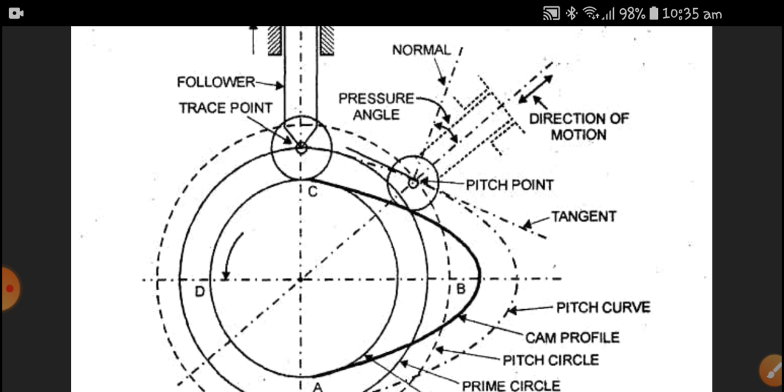And next, cam profile, pitch curve, tangent to the pitch point, and the pitch point, pressure angle, normal to the cam, direction of motion. Trace point is a very important point for the cam.

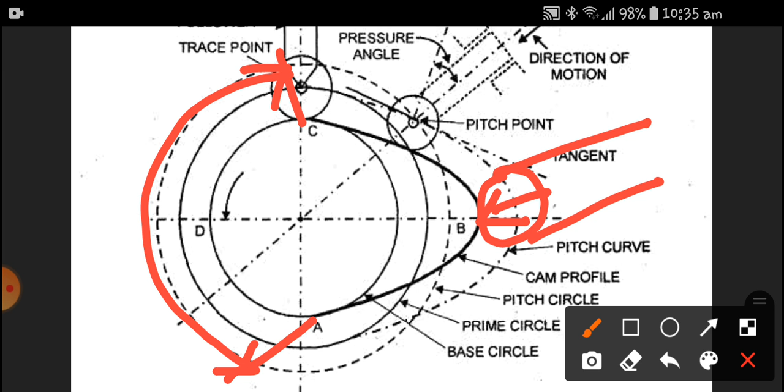The follower: once the cam has a rotary motion, the follower has a reciprocating motion. Cams have an eccentric rotation. Here this point is called the lobe, this is called the top lobe point. At this point, when the follower reaches here, it has maximum displacement, and this angle is called the dwell angle, where the follower remains the same. The follower position remains the same, which we will discuss further.

First of all, as I said, the cam is a mechanical member and it has an open higher pair. The follower and the cam have direct contact. And once again, I would like to remember this: the higher pairs have either a point contact or line contact in nature, and here the cams and followers have a direct contact.

Cam motion is reciprocating or rotary, and most of the time, 95% of cam and follower applications, the cam is rotating and the follower is reciprocating. And here, the cam is the driver member. Everywhere the cams are used, all cams are driver members and the followers are the driven member. The follower can rotate, reciprocate, or sometimes it can be oscillating also.

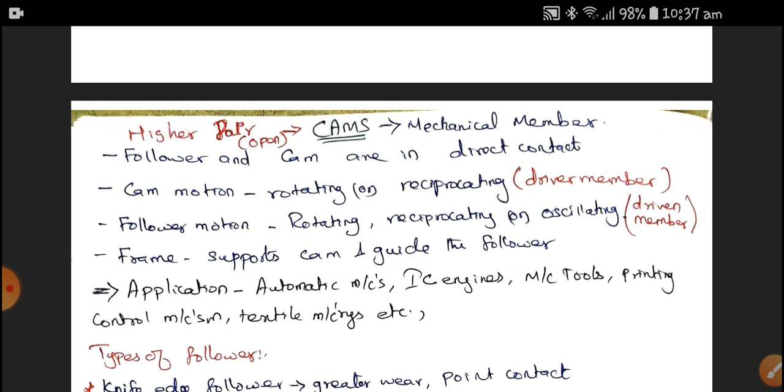Here the frame is one thing which will support the cam and guide the follower, that is called the frame. The applications of cams and followers are automatic machines, IC engines, machine tool applications, printing control machines, and textile machineries, etc. Wherever we need automation, cams are very useful for making automation.

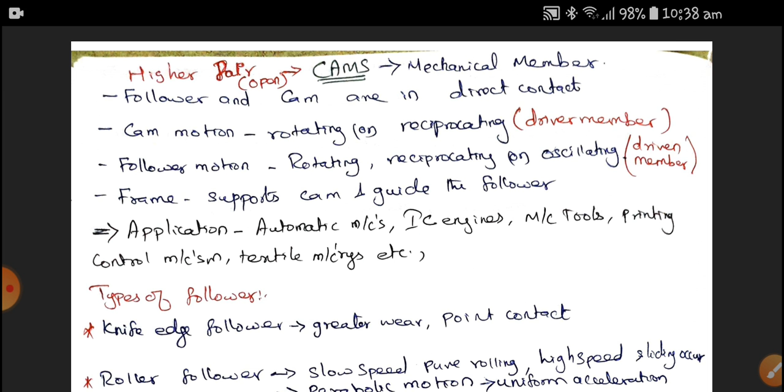And also nowadays, most vehicles running with an IC engine definitely have a cam. The cams are very important components of the IC engine, where the cam operates all the valves, all the spark plugs, spark plug, diesel pump, all are operating. That is why it is an important element in the IC engine.

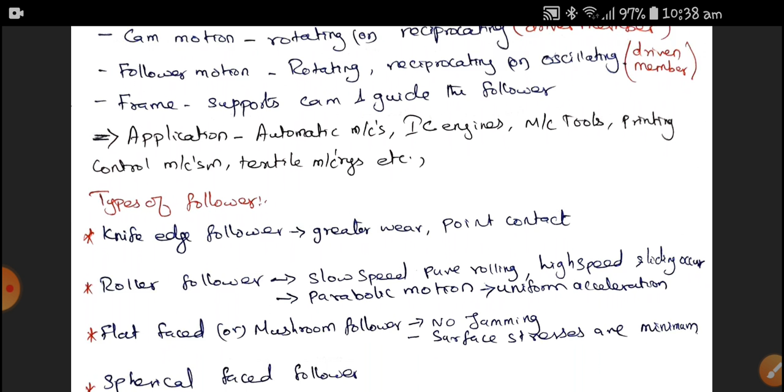And next we are going to discuss types of follower. We have nearly 8 types of followers, and the first one is the knife edge follower. The knife edge follower has a very sharp point on the follower, where the point of contact is a point contact.

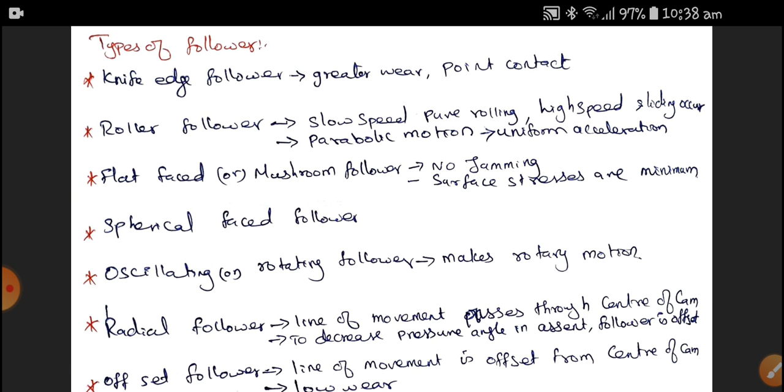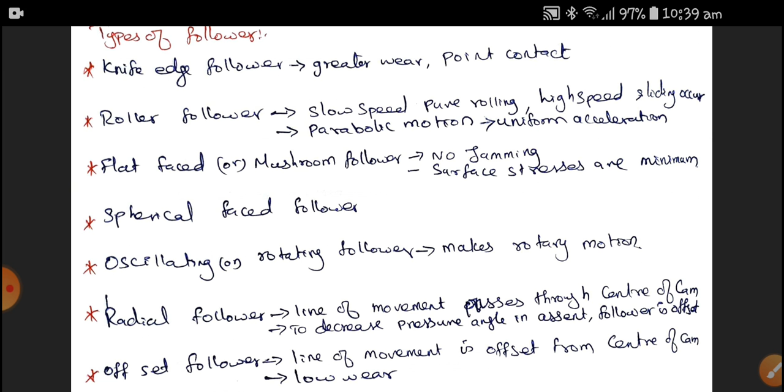Here the point contact is not a line contact, it is exactly a point contact for the knife edge follower. Also, the greater disadvantage is the wear in the knife edge follower. We can't maintain the knife edge at all times since the point contact causes huge wear, therefore the knife edge will not be maintained, and most accuracy is lost at the knife edge.

Next, the roller follower. In roller followers, mostly at slow speed pure rolling occurs, while at high speed sliding occurs. For low speed, roller followers are used. For parabolic motion, uniform acceleration is needed.

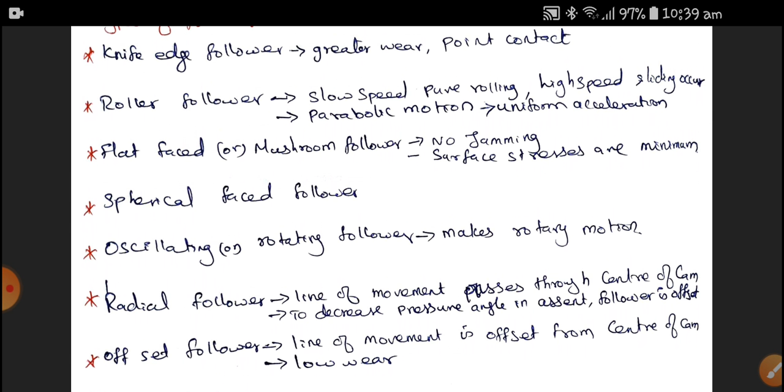The flat faced follower or mushroom follower produces minimum surface stress. The surface stresses are minimum, and also no jamming takes place.

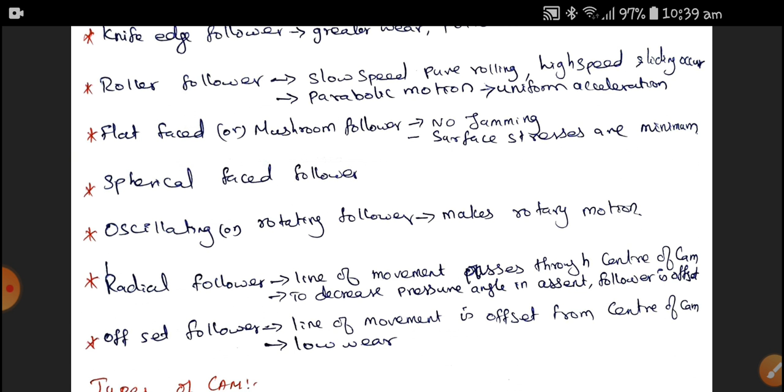The next one is the spherical faced follower, and next is the oscillating or rotating follower, which makes the follower move in rotating motion.

Next is the radial follower. The line of movement passes through the center of the cam, and to decrease the pressure angle during ascent, the follower is offset. This point is very important. The follower offsets mostly happen in radial followers only. In order to decrease the pressure angle, the followers are offset.

Next one is the offset follower. The line of movement is offset from the center of the cam, and here it produces low wear.

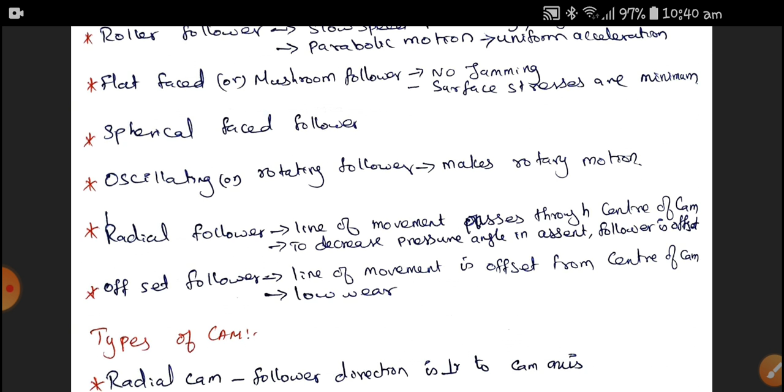Next, type of cam. There are two types of cam: one is a radial cam and another is a cylindrical cam. In the radial cam, the follower direction is perpendicular to the cam axis, that is called a radial cam, whereas when the follower direction is parallel to the cam axis, it is called a cylindrical cam.

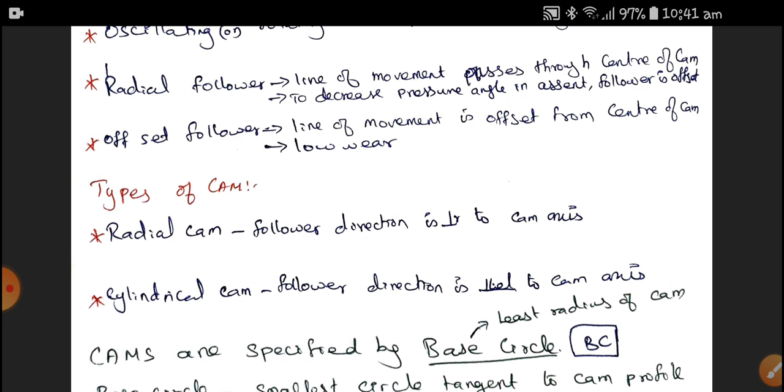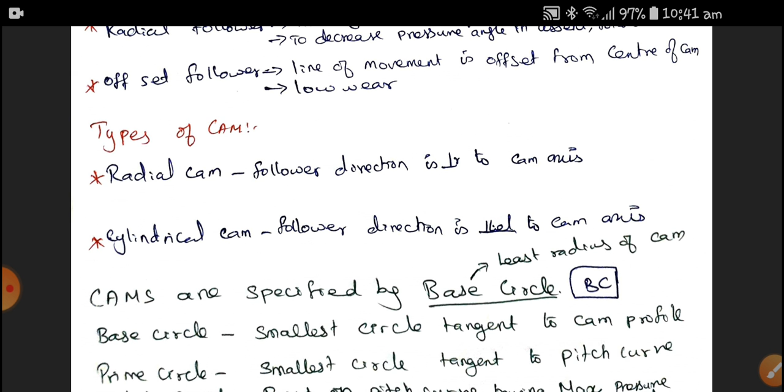Next, this is important: cam specifications. Cams are specified by means of the base circle, where previously we discussed the nomenclature of the cam, and the cam base circle is very important. The size of the base circle specifies the cam size. The base circle is the smallest circle tangent to the cam profile, and the prime circle is the smallest circle tangent to the pitch curve. These two words you have to remember.

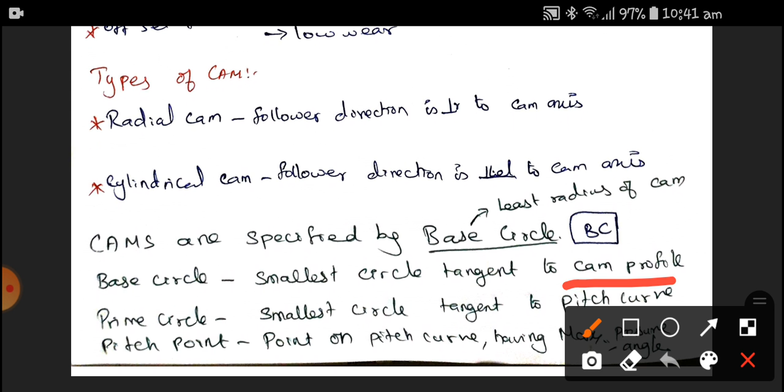These two things you have to remember: cam profile and pitch curve. Next is the pitch point. The point on a pitch curve having maximum pressure angle is called the pitch point. On the top of the lobe, it has a pitch point.

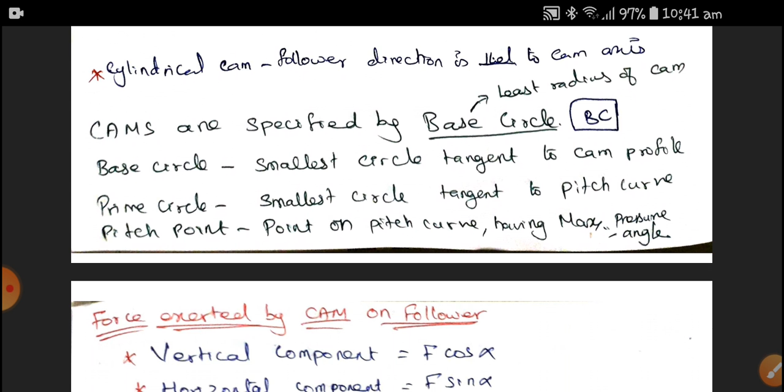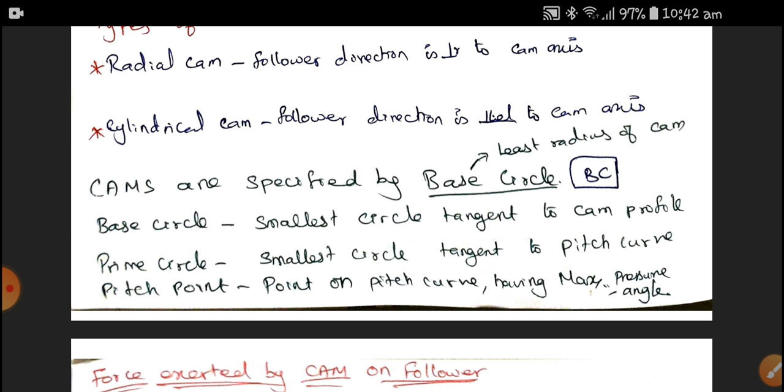Next, if there is a cam and follower, since it is a higher pair and it is in an open pair, forces are required to make the cam and follower into a closed pair. Therefore, the forces exerted by the cam on the follower are: vertical force is F cos alpha, and horizontal force, the horizontal component, is equal to F sin alpha.

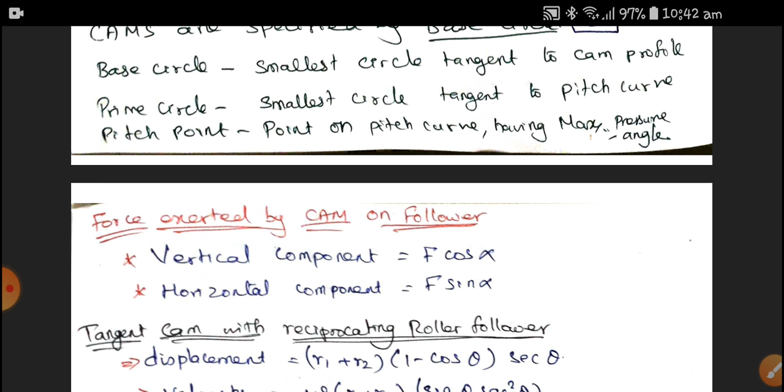For the tangent cam with reciprocating roller followers, the displacement, velocity and acceleration are discussed here, as well as for the tangent cam circular with the flat follower, where the displacement S is equal to R1 plus R2 (1 minus cos theta) into secant theta.

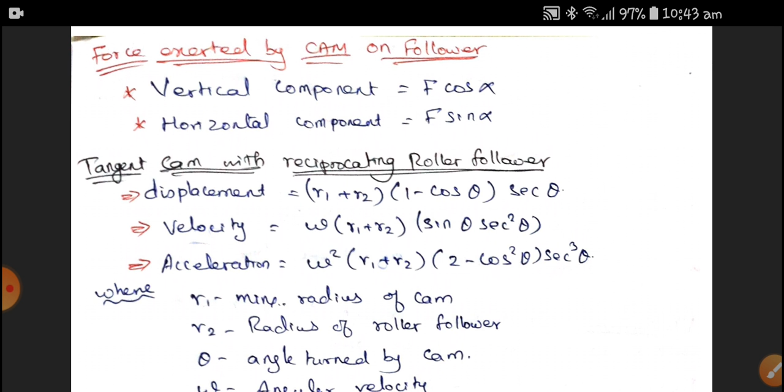Here R1 is the minimum radius of the cam, R2 is the radius of the roller follower, and theta is the angle turned by the cam, and omega is the angular velocity. We know that velocity is equal to omega into r, or omega into s. Therefore, the displacement is s.

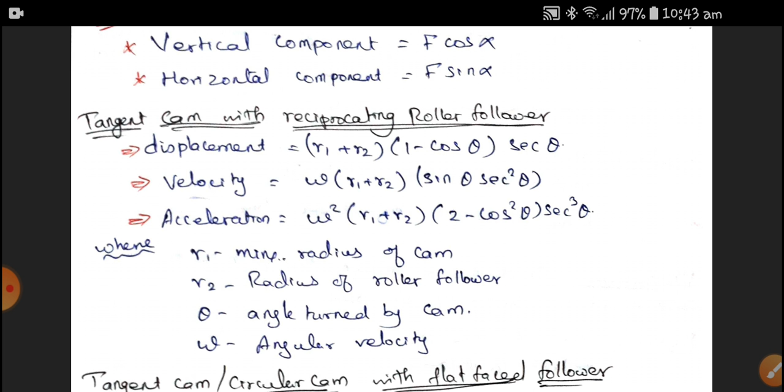Therefore, velocity is equal to omega into s, that is equal to omega into (r1 plus r2 sine theta) into secant square theta. As well as the acceleration is omega square into (r1 plus r2 into 2 minus cos square theta) into secant cube theta. Next one is the tangential cam or circular cam with flat faced follower.

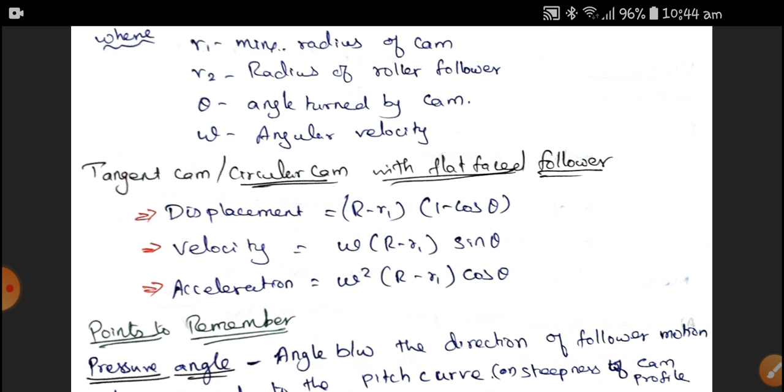The displacement is equal to capital R minus R1 into 1 minus cos theta, and velocity is equal to omega into capital R minus R1 into sine theta, and acceleration is omega square into capital R minus R1 into cos theta.

Some points to remember: the pressure angle, which is very important for the cam profile, is the angle between the direction of follower motion and a normal to the pitch curve, or the steepness of the cam profile. If the pressure angle is too large, the reciprocating follower will jam in the bearing.

We have two types of cam and follower applications: cam and followers used in automobiles have a spherical faced follower, while for aircraft it is a roller faced follower. The roller faced follower will have a uniform acceleration parabolic motion, whereas the spherical faced follower is used in automobiles.

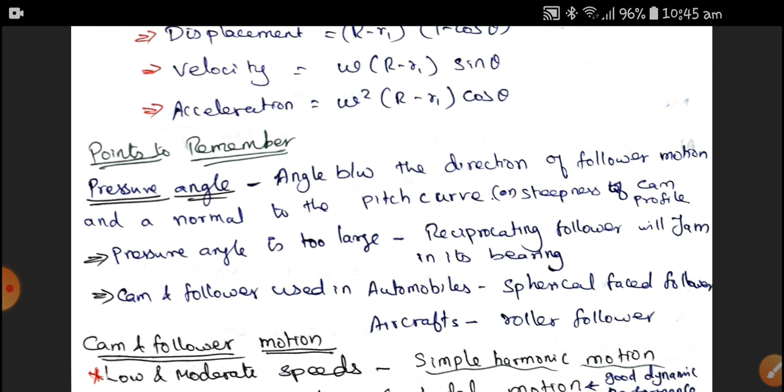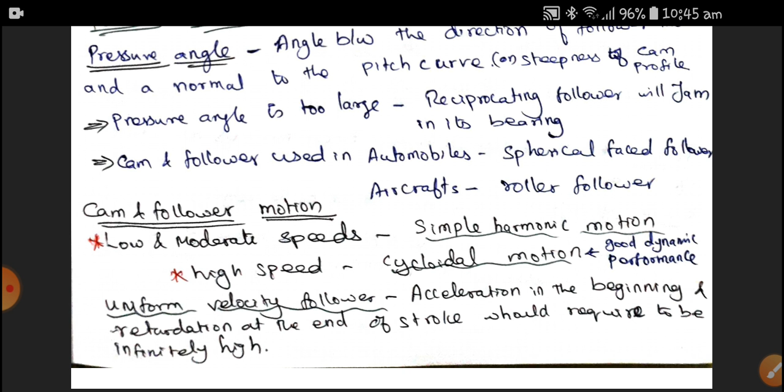Next, the cam and follower motions. We have different kinds of motions: one is simple harmonic motion, used for low and moderate speeds, while cycloidal motion is for high speed applications and has good dynamic performance. For uniform velocity followers, the acceleration at the beginning and retardation at the end of the stroke would need to be infinitely high.

Next is simple harmonic motion, which rotates with uniform angular velocity. It produces low jerk, and maximum acceleration a is equal to h by 2, times pi omega divided by phi, the whole squared. It represents the cosine curve.

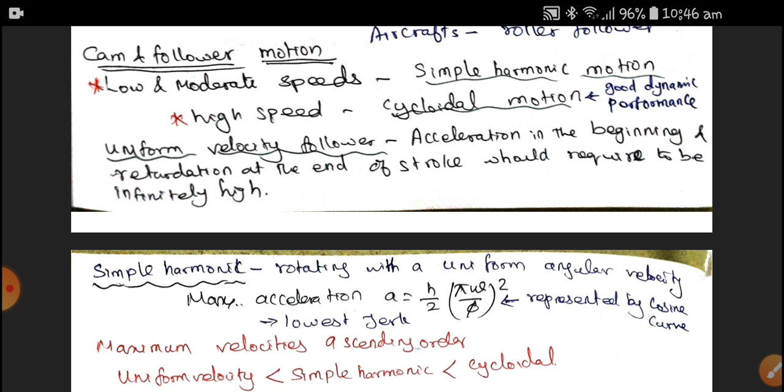As per velocity, the high speed application is cycloidal, uniform velocity is for low speed, and for low and moderate speeds we can use simple harmonic followers.

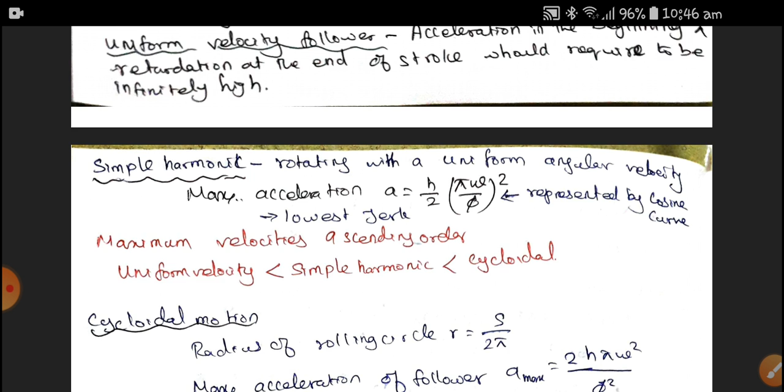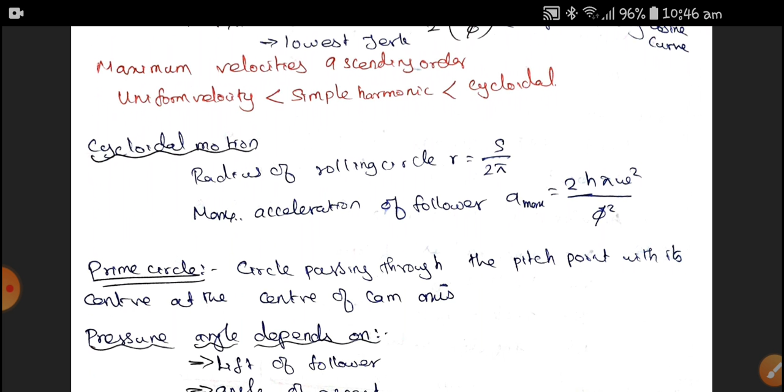Next is cycloidal motion. The radius of the rolling circle r is equal to s divided by 2 pi, where s is the displacement. The maximum acceleration of the follower, a maximum, is equal to 2h pi omega squared divided by phi squared, where phi is the angle of cam rotation.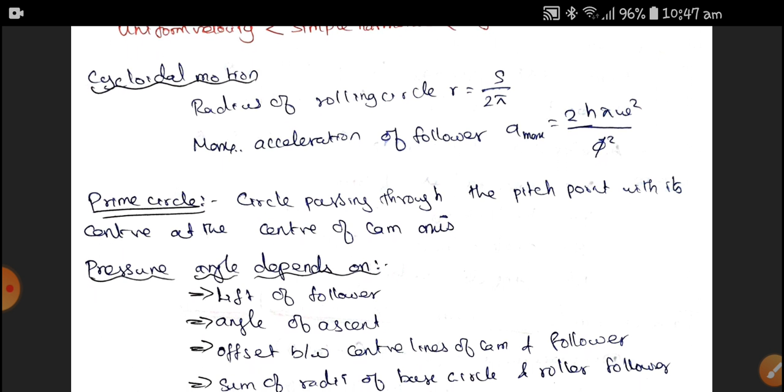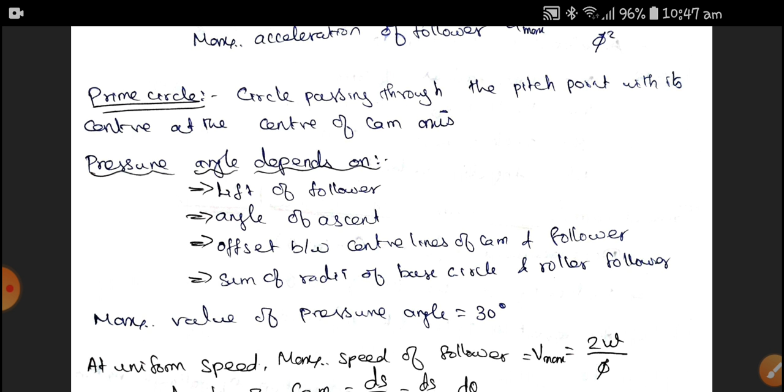Next is the prime circle. The prime circle is the circle passing through the pitch point with its center at the center of the cam axis. The pressure angle depends on the lift of the follower, the angle of ascent, the offset between the center line of the cam and follower, and the sum of the radii of the base circle and the follower. Note that the maximum value of the pressure angle is 30 degrees.

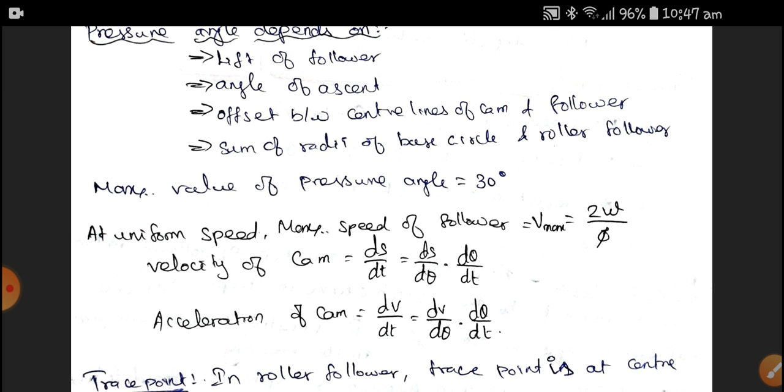For uniform speed, the maximum speed of the follower V max is equal to 2 omega by phi, whereas the velocity of the cam is ds by dt. Here, instead of dt and ds, we can multiply by the angle: ds by d theta into d theta by dt, simply multiplying d theta in both numerator and denominator. We get the acceleration of the cam as dv by dt, that is dv by d theta into d theta by dt.